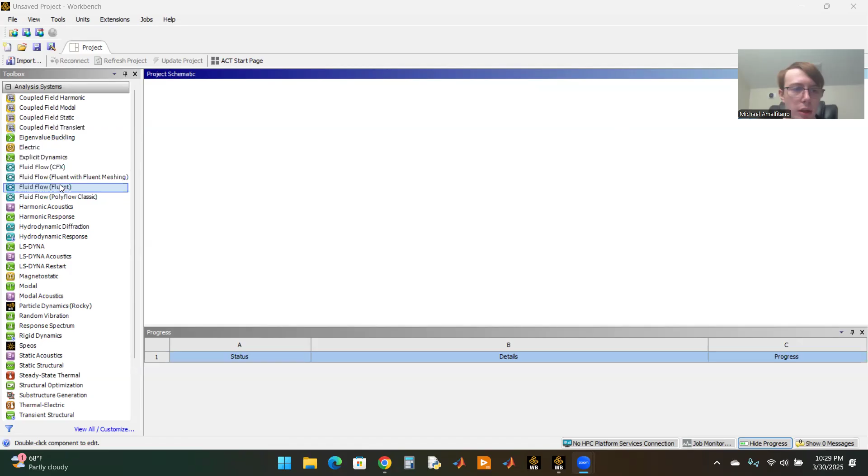So we're going to make the wind tunnel as normal.

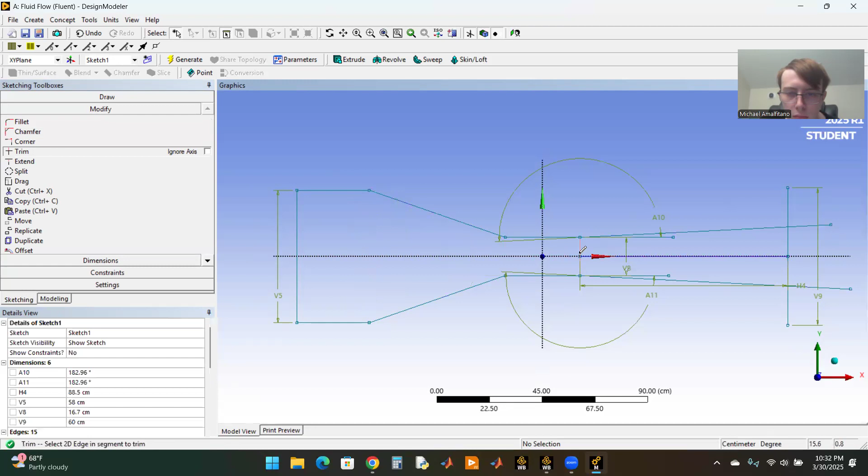Okay, now we have to make the flat plate in the middle. So what I'm going to start by doing is making a rectangle, and I want to make this really far back just so that it doesn't get messed up at all.

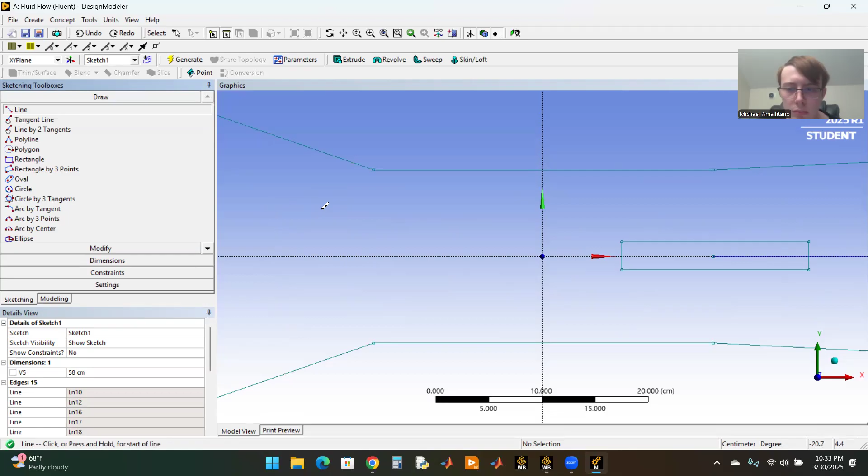I'm just going to make a vertical thing right there. I'm going to dimension the flat plate. So it is 23 centimeters long and 0.26 centimeters thick. That line never got rid of. There you go.

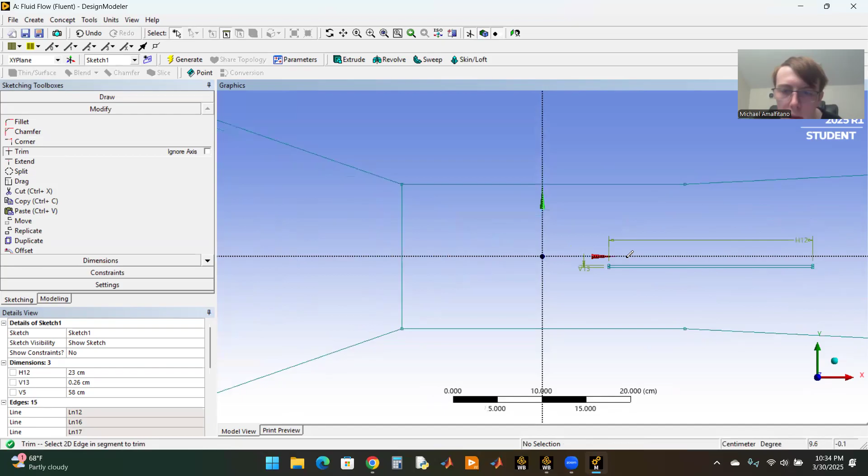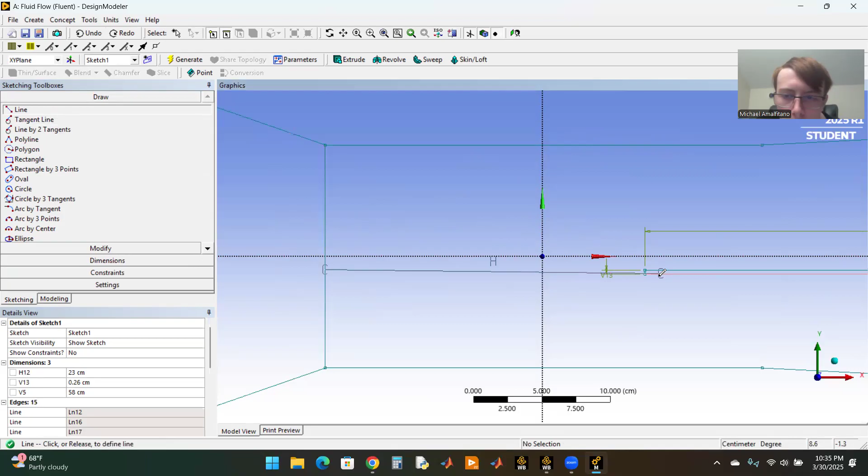And then on to draw a line from here. Let me undo that. I need it to be roughly a horizontal line. Then I need to dimension this horizontal line, and that needs to be 4.45 centimeters.

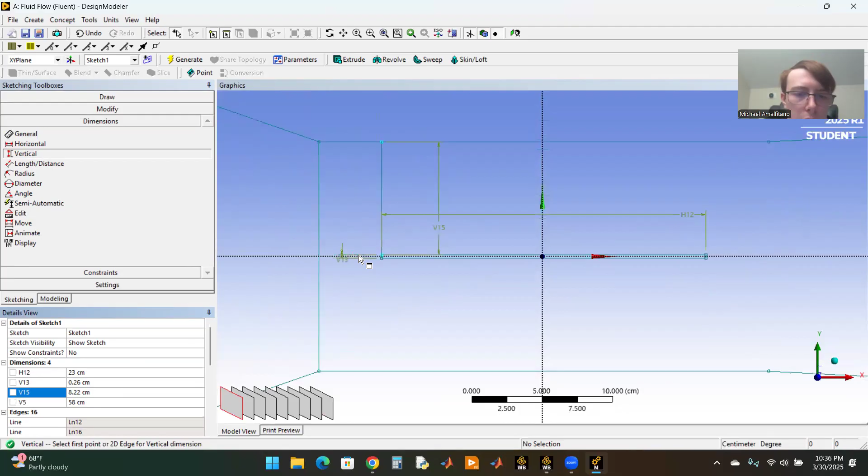And now to make sure I don't mess anything up, I'm going to get rid of that really quick. And then I'm going to draw a line from this top. Make sure it's a vertical line. Then I'm going to dimension this vertically from here to here. And this needs to be 8.22. So it's centered in the test section rather than centered on the axis. Let me just draw this line one more time to make sure it didn't get messed up.

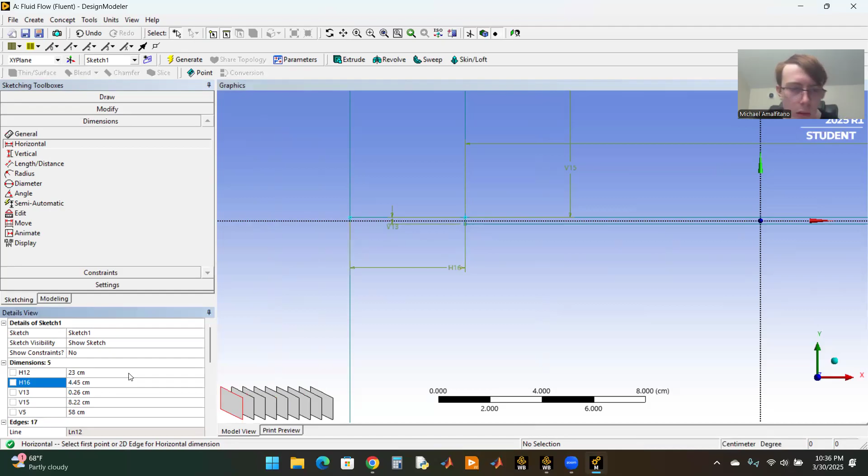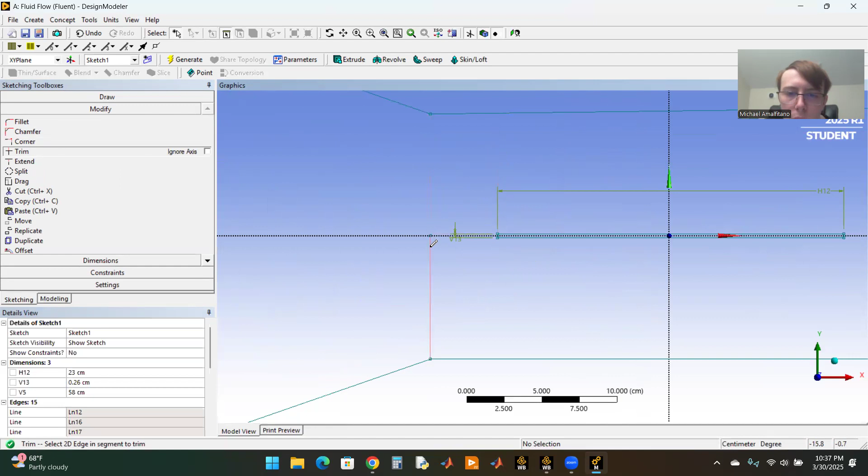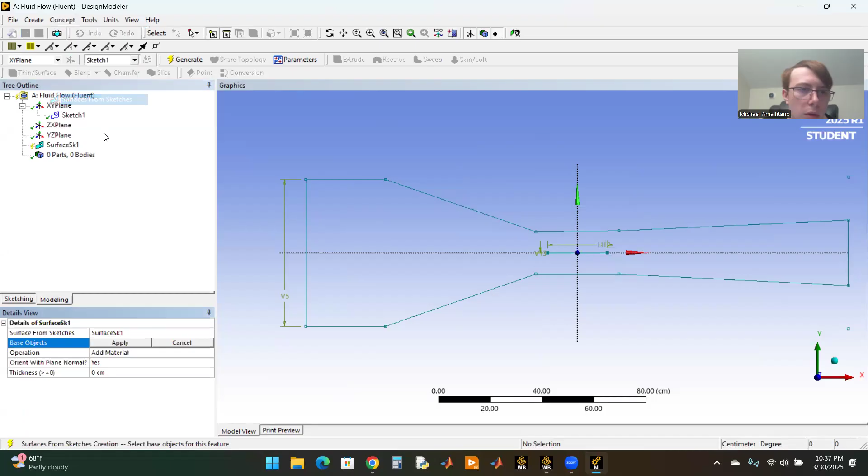8.22 and 4.5. All these numbers look good. The wind tunnel is not messed up in any way, so we're now going to trim all of these away and just leave us with our plate in the middle. And make sure our wind tunnel is included, but the plate isn't, so that's all good. Looks good.

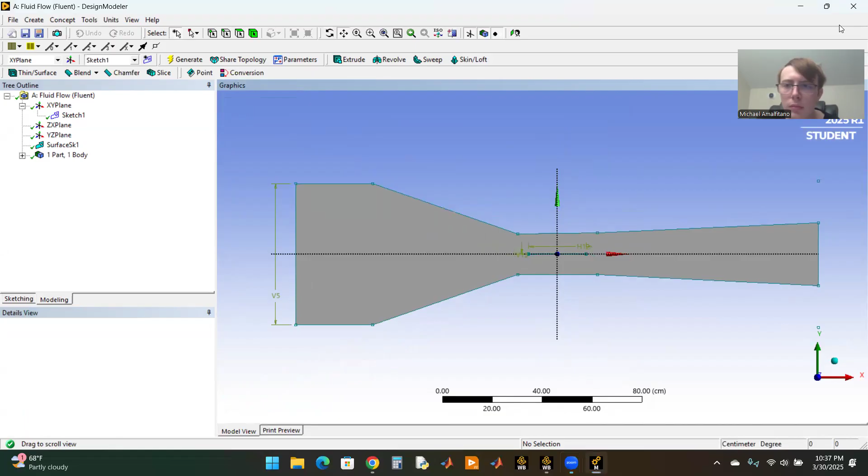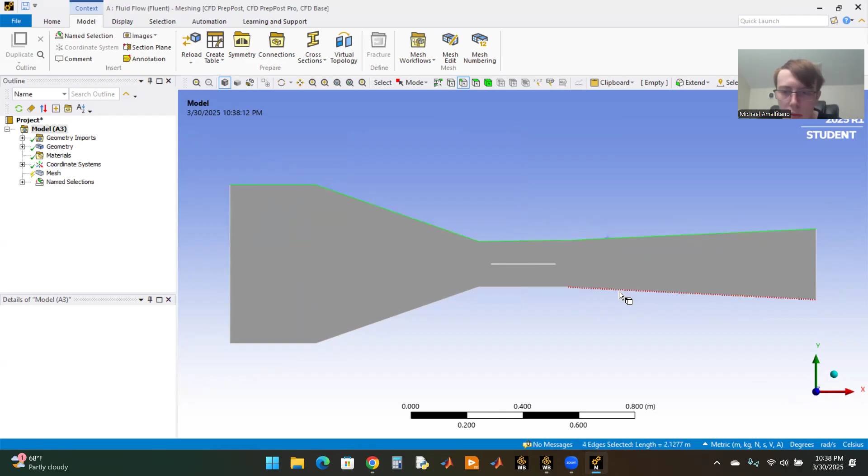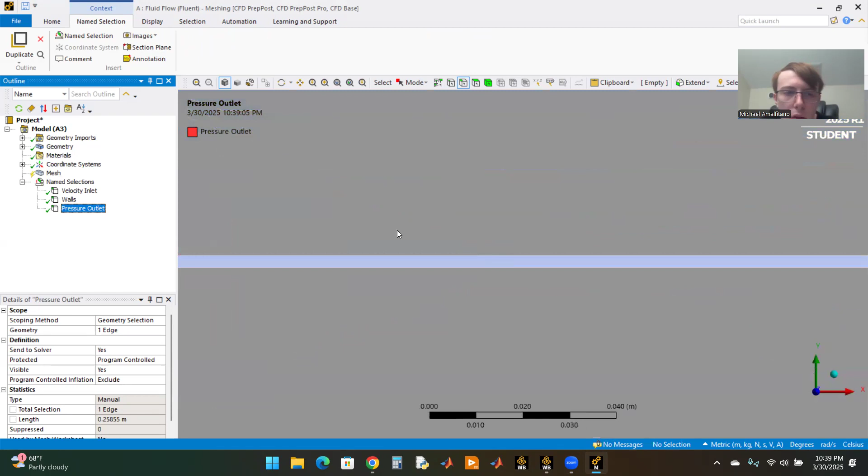We're back in the mesher. Let's just zoom in, and while we're here, let's name everything. So let's make sure we're on edge select and name this the velocity inlet, and the walls, name this the pressure outlet. Nice. And now let's go back down here.

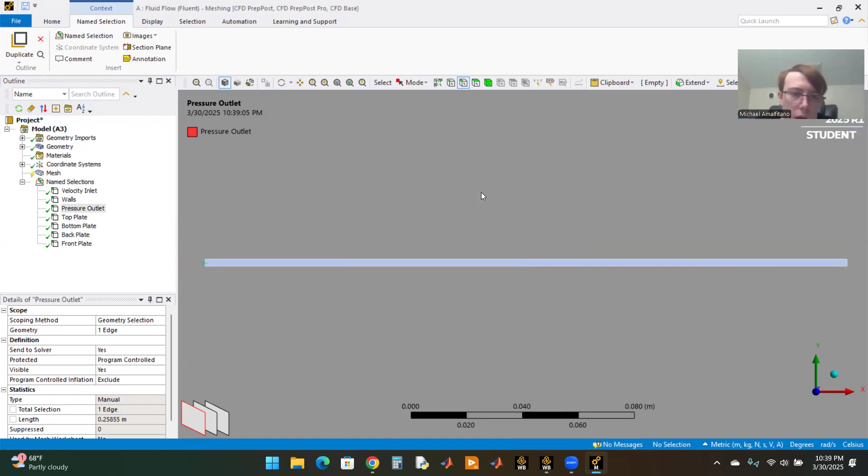This is going to be named top plate. This is going to be named bottom plate. This is going to be named back plate. And this is going to be named front plate. Top plate, bottom plate, back plate, front plate. Everything looks good.

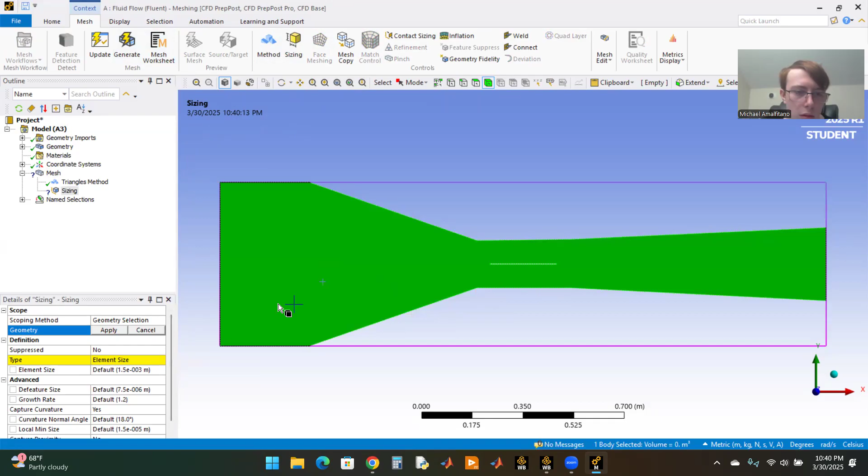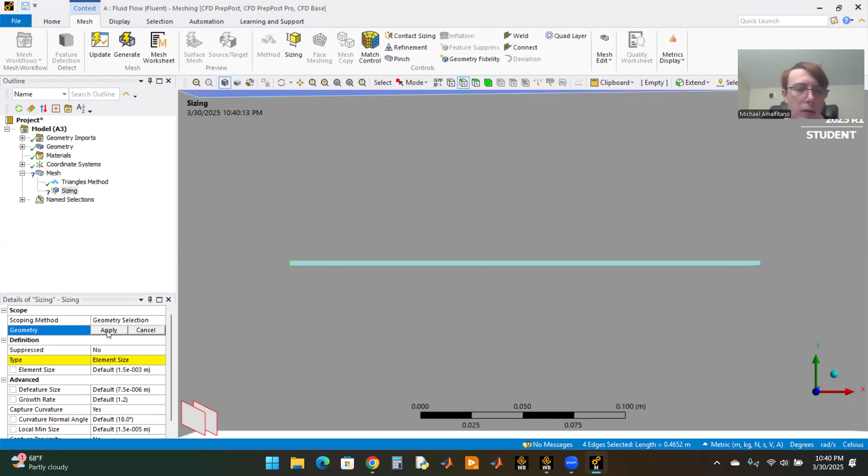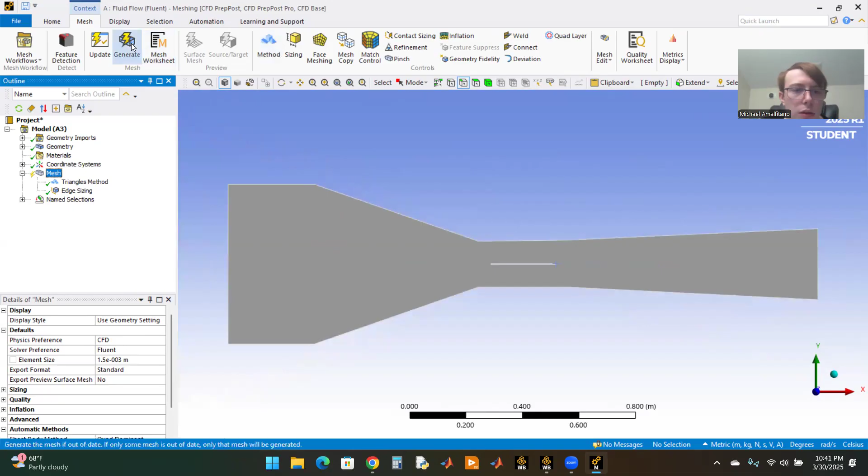Let's go to mesh method, triangle. 0.0015 is the size I'm going to use. Now that I'm here, I'm going to get back on edge select. I want to select all pieces of the flat plate. It says 4 edges, which means it got all of them. That's good. We need to make this 0.00015, so it'll be 10 times smaller. Everything else looks good. So now we'll just generate, and I'll be back when that's done.

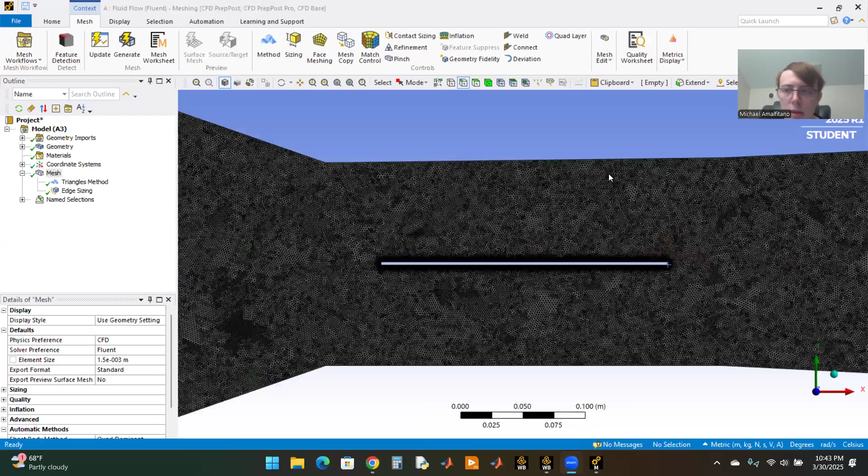I finished meshing, and you see the mesh looks good zoomed out, and then you zoom in and you can see it gets finer and finer to the surface of the flat plate, and that's exactly what we want. So we're good here. So you want to just update this. And then I'm going to click on setup, and I'll be back when that's loaded. Just wanted to point out, make sure you're on double precision.

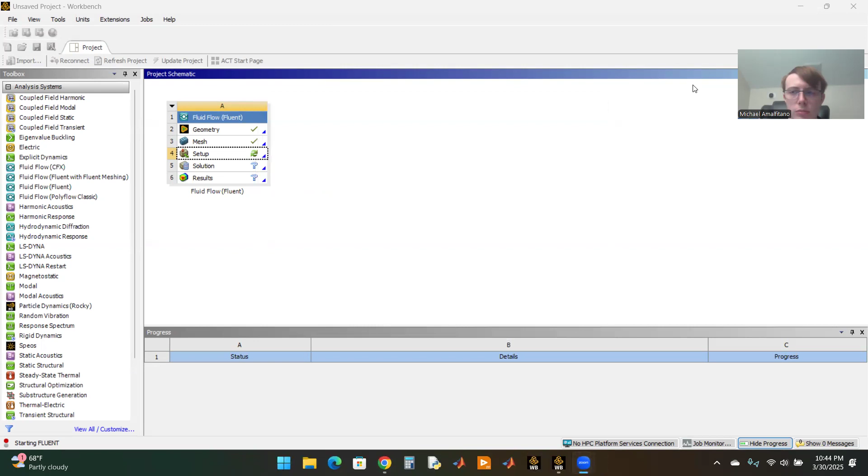Alright, it all the way opened up, so we need to check on models. We want to put on viscous laminar. Make sure it says viscous laminar. Materials, fluid, make sure you're on air. These values all look good. Boundary conditions, we're on inlet, velocity inlet. So based on the area ratio and our values for the test section velocity, I got a value of 2.371 at the velocity inlet. So that's good.

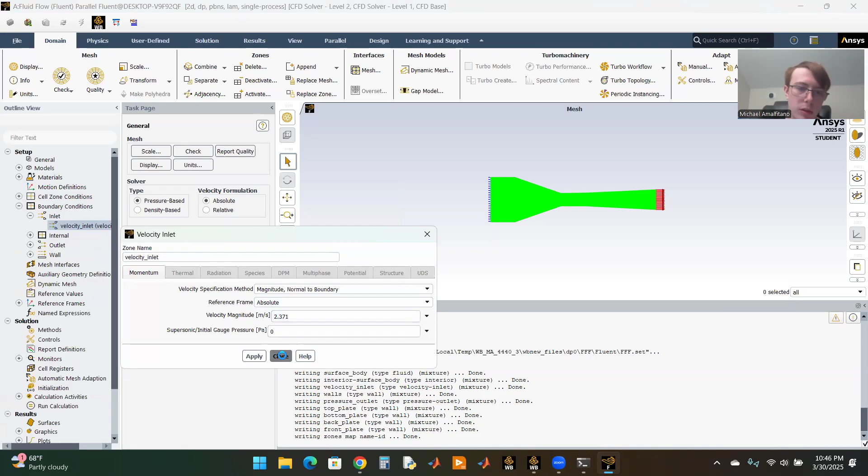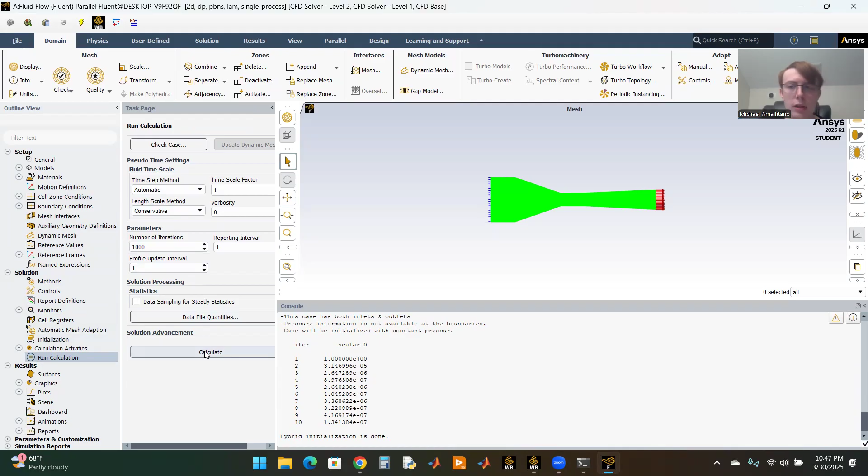We'll go to initialization. We need to initialize, and I'll be back. All right, we initialized. So now we're gonna go to run calculation. I'm gonna put on 1,000 iterations because it gets better results, and then click calculate, and I'll be back when it's done.

Okay, it finished. So what we need to do now is make a new line. I'm gonna name these X1 to 3, and these are gonna be lines in the test section on top of the plate. So based on the geometry of the wind tunnel and where I placed the plate, we need to go 0.2 centimeters in from the front, so that would actually be at negative 0.112 meters.

And we want to just do it at a single point, so the x's will be the same, and the y's we want to raise it. So 0.0013 is actually the top of the wind tunnel, or on top of the flat plate, sorry. And then 0.0043 will be above that, just to give us a little bit of room to see if we can capture the boundary layer. So I'm going to make sure those values are right and then create it, yep.

So X1 is there. I'm going to create the next two as well. So X2, this one is going to be negative 0.034. This one is going to be 6 centimeters or 8 centimeters in from the front of the plate. Okay, it's gonna be on top of the flat plate, which is where the 0.0013 comes in, and then we're just gonna make this bigger than the last one by a few millimeters. Create that one, that's X2.

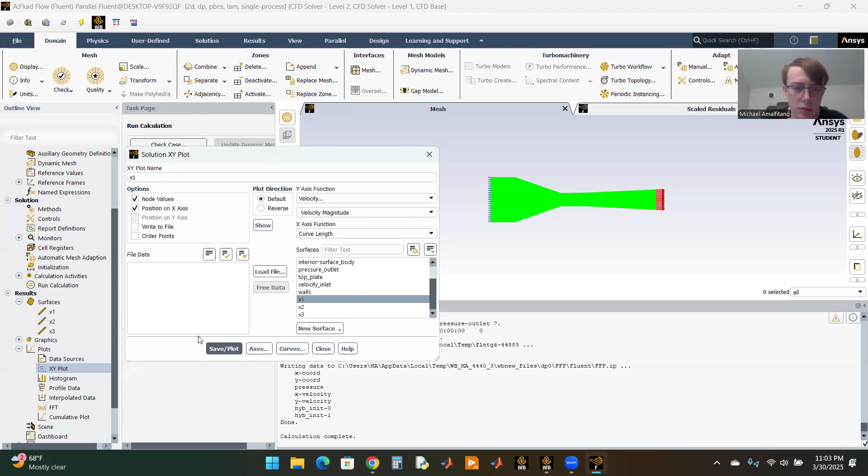I'm going to call this X1. I'm going to do velocity, velocity magnitude, curve length, and we're going to do this on X1. This is what it should look like, and then you can write to file and stuff. Okay, close that one. I'm going to make another one. Velocity, curve length, X2, save plot. You can export that one as well. That looks good. Close. Oh, it didn't get renamed. Just call it X2. There we go.

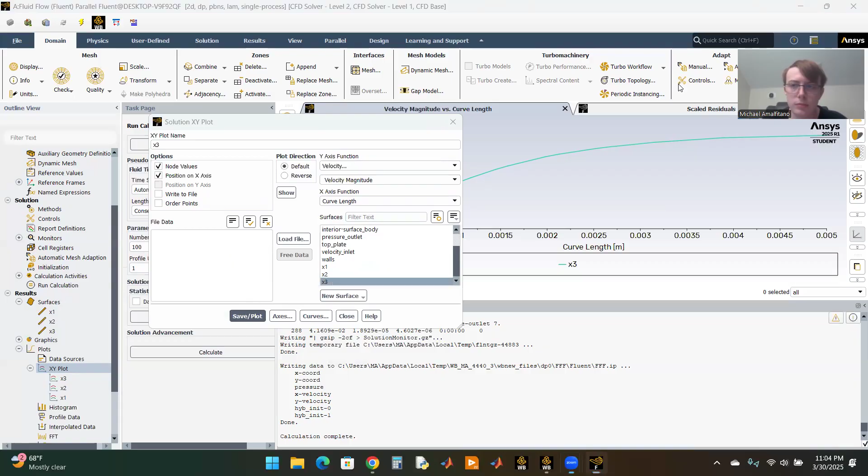And then we're going to make another one. This is going to be X3, velocity, curve length, X3, save and plot. Looks good. And then you'll save or write to file to figure out where the boundary layer is. Then we gotta close this. Now we're gonna make another new one.

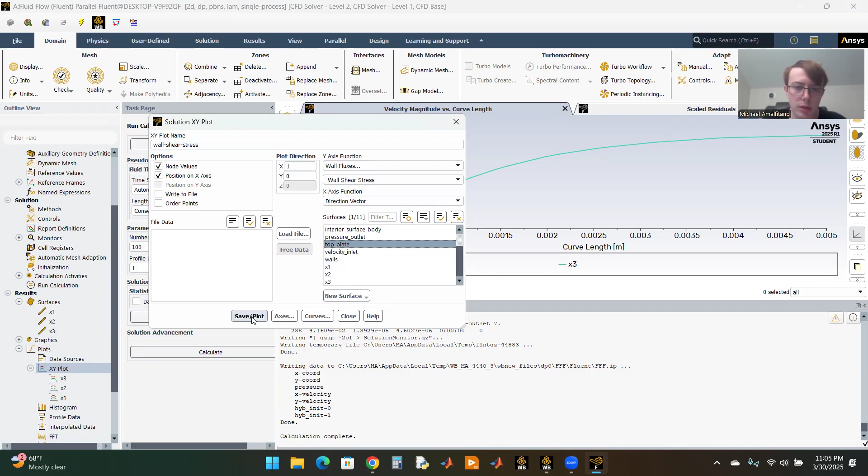This one we're gonna call wall shear stress, and this one we're gonna do wall fluxes, wall shear stress. Then we're gonna do this on the top of the plate. It should be more at the front, so this looks decent. Looks good. And then you can obviously write that to file, and then we also want the skin friction coefficient in the same area. That looks good as well. You can write to file as well, and that looks all good.

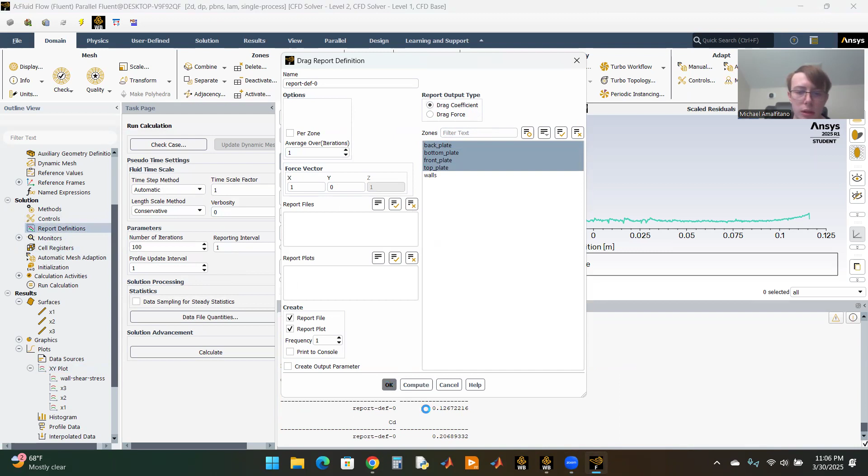Now that that's done, we want to actually come back up here to report definitions. We want new force. We want drag. So we're going to select all of the plate surfaces. We're going to start off with drag force. Just going to compute that, and then we'll switch it over to coefficient and compute that. And then it's down here at the bottom. These numbers are okay, so we're good with that.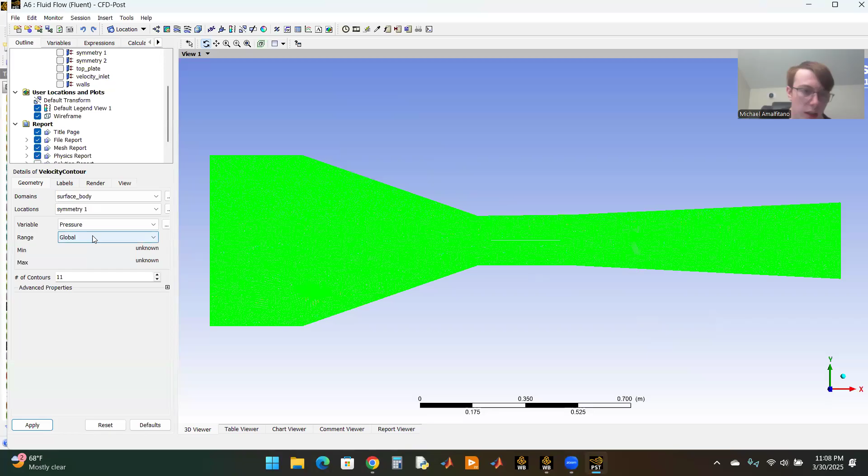And then I'm going to go to the solution thing, and I'm going to make the velocity contour. Now that we're here, I'm going to click on this Z, and then come down to here. To insert a contour, I'm going to call this velocity contour. And then we want this on the surface body on the symmetry 1. We want velocity. We want global. Number of contours, let's just do something like 100. And see where that gets us. Give it a second.

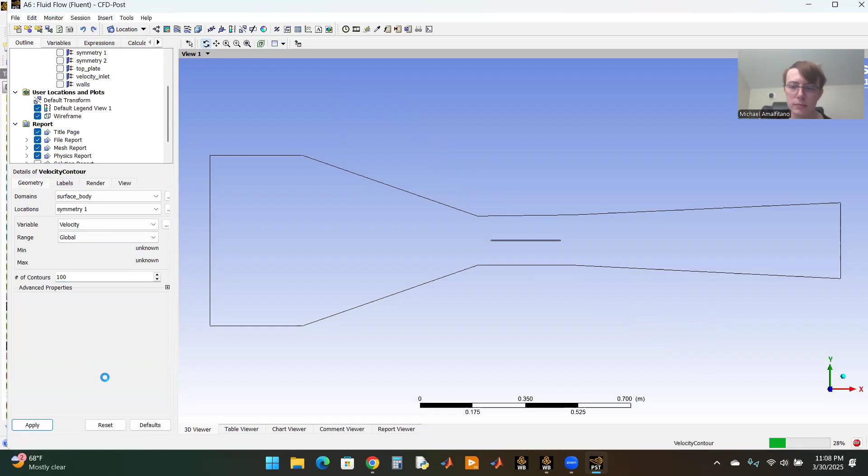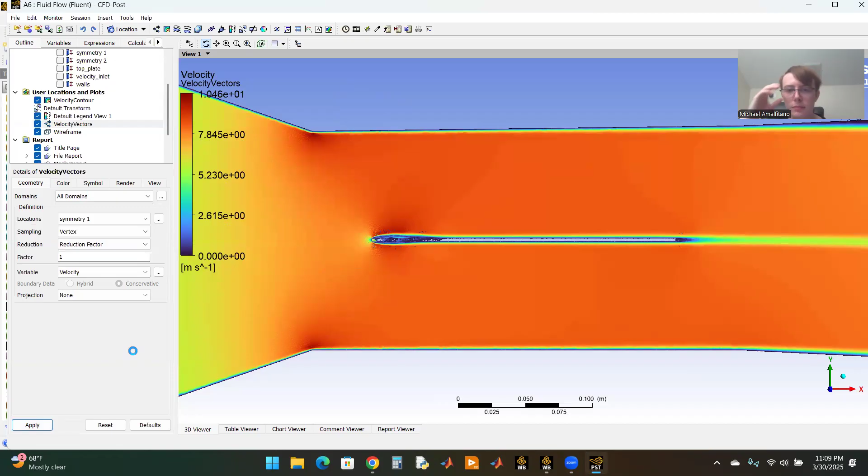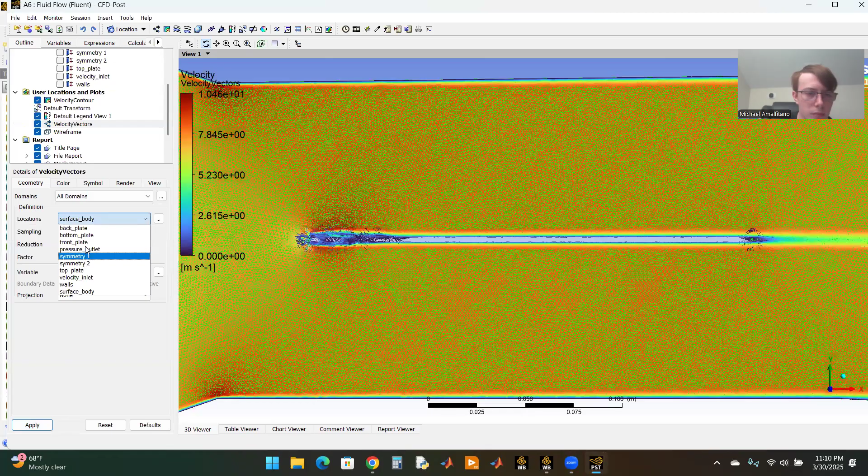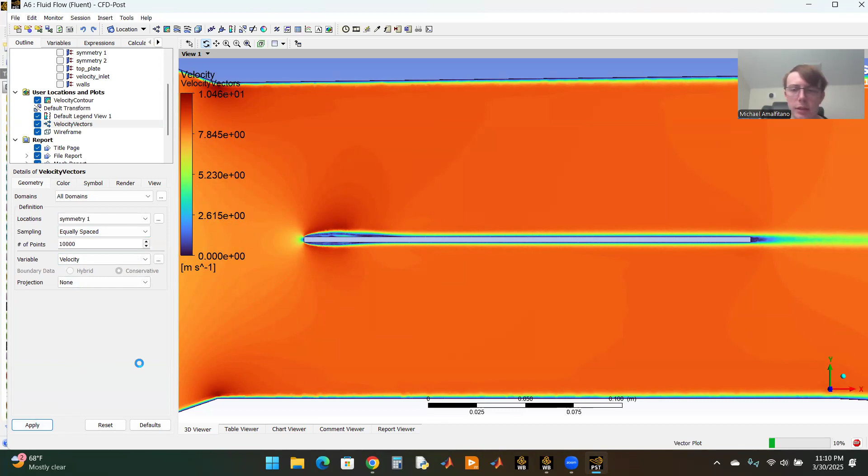We'll put that along symmetry 1 as well. I forgot to select that. Maybe it was surface body. No, that's not good. Sorry, this should be the right settings. I got confused. Figured out the problem. You just have to go to color, constant, and I made them black so they're easy to see. And there we go. You can see everything, how it's flowing throughout, and then you can, ooh, I don't want to do that.

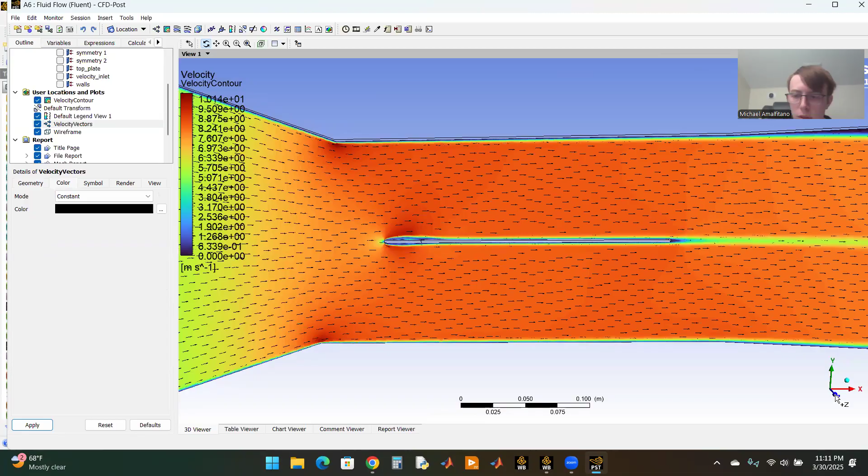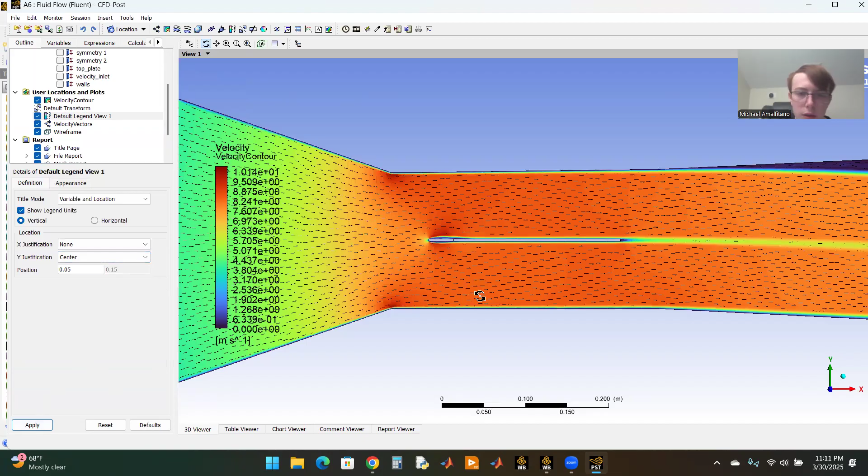You can adjust where the legend is. I'm going to change this to none and change this to this, and then change this to this. And it'll give it a nice location that you can see that. And that's the rest of the lab.